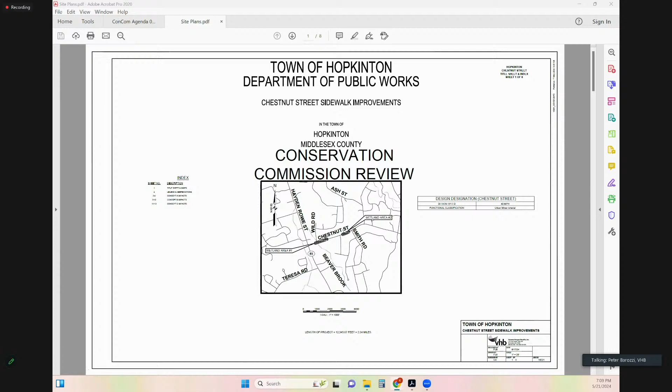So we had put together initial preliminary designs, and that's what I put together as alternative A for this, which includes shifting the curb in towards the road. We found this to be the least amount of impact.

However, in subsequent discussions with the town, with Kerry and engineering, they expressed concerns over bringing the road in and narrowing it. There is enough movement for traffic, but from experience on Main Street and other concerns impacting the existing drainage structures there, they expressed more of a desire to maintain the existing curb line.

So the alternative we show here shows the existing sidewalk, our rough limit of grading from our models as to areas that would be impacted. In this alternative, there would be a 6-inch granite curb as our roadway edge treatment, and then a 5-foot sidewalk right up next to it.

And again, so it kind of shows what it would look like in this area. We put together some rough metrics as to what we think the impacts will be. Again, these numbers aren't definitive.

We haven't advanced the design to final because we wanted to get the commission's input on how they felt about these alternatives before we move ahead and try to present something a little more final, in which case we'll be going ahead of the commission, submitting an NOI, and these numbers will be a bit more finalized. So this was alternative A, with the curb line shifted in.

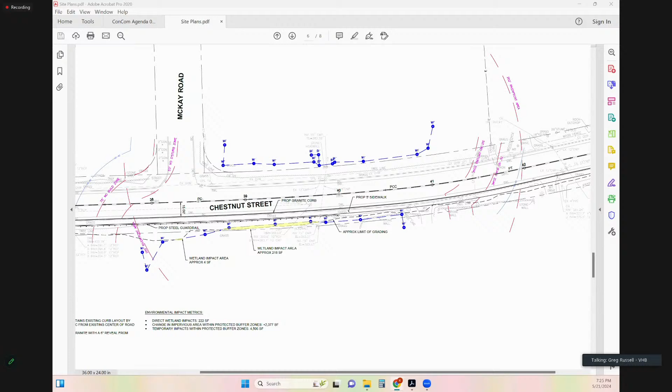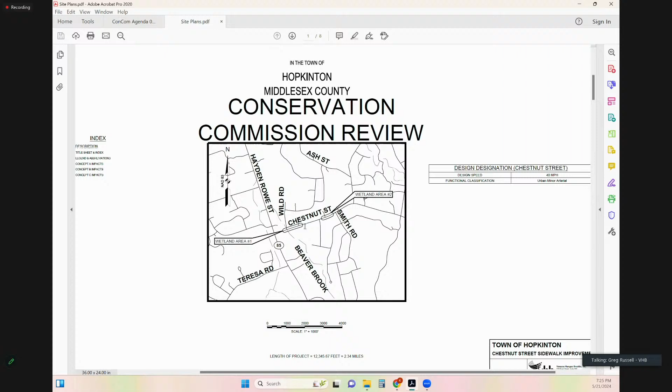And then with the intent, we were looking at it in sections, with the long-term vision of potentially carrying this all the way out to the traffic signal at Hayden Rowe. But that got put on hold due to the need to replace the existing culvert just to the west of Wild Road. So a few different things went into that decision.

Again, the limits of this are based on funding and the available funding that the town has. So depending, we may put this out with one piece as an add-on to the project to see what kind of, so the limits may change in construction, but we're looking to permit the whole piece at the moment, just so that we have that flexibility when we go to construction.

Through the chair. Yes, Matt. Apologies if I missed this, I was on my phone earlier driving. What are the project limits? I see 2.34 miles, but we've only got wetland area 1 and 2 highlighted. Are you guys going from Wild Road to Smith Road, or where does this begin and end?

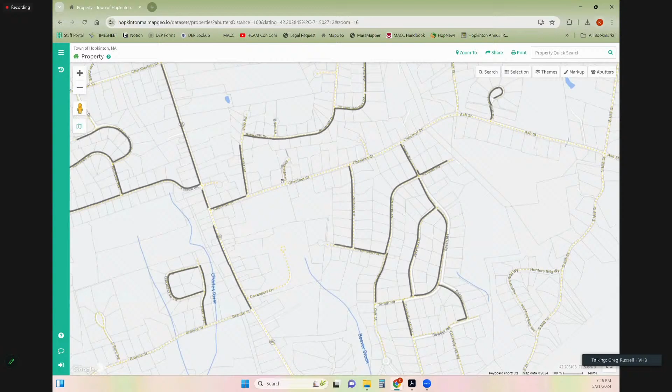So the initial plan was to go from Wild Road to Smith Road. I think the 2.34 is a typo, but we're basing that on, again, available funding. We looked at it based on the funding that was available. We said that might get us to a certain point.

We also applied for a grant through the DOT Shared Streets program to extend the limits of the project, make sure we got all the way to Smith Road, or further if we needed to. And then, just from a planning standpoint, it made sense to look at whether it made sense to bring the sidewalk all the way out to Hayden Rowe and tie it to the traffic signal directly.

So we took a look at that, and the town's having a culvert assessment done currently. One of those is the culvert just to the west of Wild Road that's been called out for replacement. So we felt that at this time, Wild Road was the appropriate place to end it, rather than build a new sidewalk to have it ripped up when the culvert needs to be replaced.

Yeah, makes sense. And is there going to be design incorporated into this project to cross Chestnut Street or Wild Road? Yes. So we'll provide wheelchair ramps and ADA compliant crosswalks.

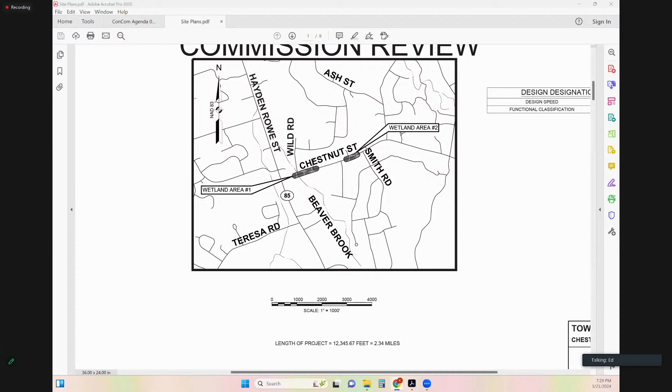Does anyone on the board have any other feedback? Through the chair, this is Ed. Yes, Ed, sorry I'm late getting into this. I had all kinds of difficulty and finally had to beg my dear wife to help, and we finally got in. I'm not really sure what our problem is, and I'm not really sure how I got in.

But my question, what is the curb width of Chestnut Street compared to the current curb width of Main Street, curb to curb? So you're asking for the existing curb width? Right, the pavement width, curb to curb. Right.

So it should be, I think, around 30 feet. You have about 4 foot shoulders existing and 11-foot travel lanes. So 22 and 8.

Correct. Okay, I just had an idea where we narrowed Main Street to put in sidewalks and bike lanes. I didn't know whether the same could be done on Chestnut Street. So, options B and C both maintain the existing pavement width of the roadway.

Okay, I think if there's no other comments, do you have enough information? Yes, Kim, sorry, just one last comment. For the benefit of the engineering team, I do think offsite mitigation could potentially be really beneficial. However, I do know that there could possibly be some problems convincing DEP. So my recommendation would be, before you potentially explore that, explore it with DEP as well to see if they also would be amenable. That's all. Thank you.

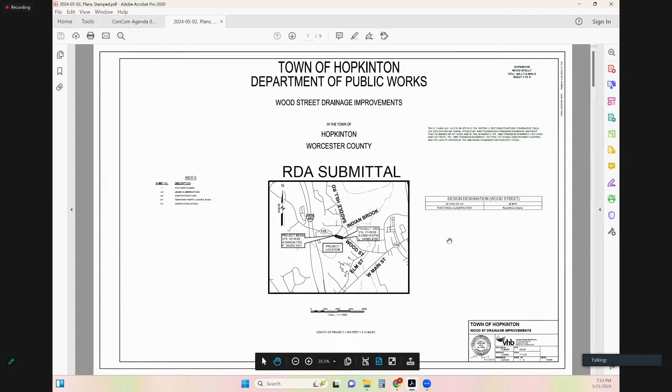So, hi everyone. All right, I don't have my camera on, but again, Kerry Reed, Director of Public Works. Thank you for having us.

As Kerry said, this is the Wood Street Drainage Improvement Project. Kerry showed an overview, but this is another overview. This is the project area right here along Wood Street. As you can see, it's right in the middle of a wetland complex with Indian Brook passing under the roadway here. We have a close-up of the actual work area between Walker Street and Indian Brook.

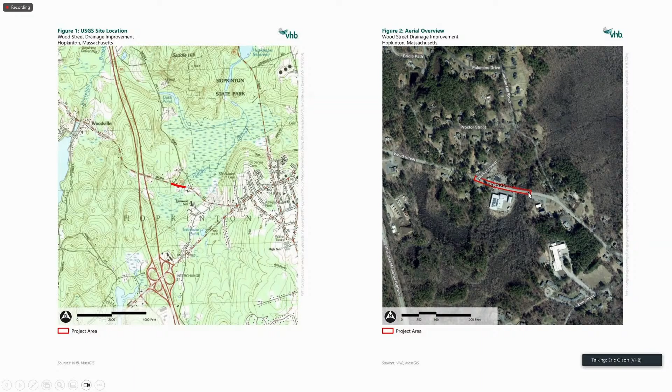The applicant is the Town of Hopkinton DPW. As Carrie stated, the project need is due to the existing outfall from one catch basin along the intersection of Walker Street and Wood Street discharging onto this residential property. It's causing flooding on the property, and we don't have permission for that drainage easement. So the work area itself would be located within the roadway easement along Wood Street and Walker Street. Everything is within the easement.

The work overview would be to terminate that outfall and reroute the stormwater underground through pipes directly to the culvert underneath the roadway that discharges into Indian Brook. Along the way, we'd also install improvements along the roadway. We'd install two new catch basins along Wood Street to capture storm drainage, install an asphalt berm along the roadway to keep the stormwater along the road and prevent overland flow into adjacent wetlands, and enhance and stabilize an existing eroded stone swale.

So just to back up a bit, this is the catch basin that's discharging in this direction, out to this point, and onto the existing residential property, causing flooding downhill here. The enhancement and stabilizing of the existing stone swale will be right here, where you can see some erosion. This is further down, Indian Brook right here within wetland 1. There's overland flow coming through this curb break, causing a little erosion. The plan is to enhance this with riprap and stabilize it so we're not having additional erosion into the wetland and stream.

So currently, I have Peter Baruzzi and Luke Boucher here with me, so correct me if I'm wrong, gentlemen. But what doesn't discharge into this catch basin and go out this outfall, probably from just east of Walker Street, just flows down the roadway and goes essentially down right here. There might be some overland flow going off the road in various areas, but I think a lot of it does directly flow right to the wetland through this eroded break in the curb right next to the DPW driveway right here.

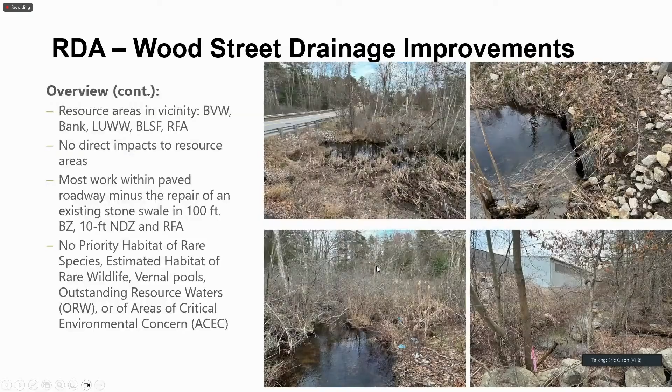So I'll back up to over here. So yeah, it flows down the roadway here and kind of goes right to the wetland through that little break in the curb. So yes, that's accurate. There's no treatment - all the water is flowing overland and not receiving any treatment or anything like that.

And so the goal of adding those additional structures would be to provide some more treatment, get some more suspended solids and everything out of the water, and get the water treated before it ends up in Indian Brook. Additionally, getting the water off the road as quickly as possible, so there's no gutter spread or anything like that, or cars splashing it up.

Okay. Yeah, Luke Boucher with VHB. Sorry, not to pepper you with four people from VHB, but I just wanted to chime in one thing.

There was one spot. Essentially, like what Eric was saying, we're running that trunk line down the road to convey this one catch basin. But since we're running the trunk line down the road, there were a couple spots where there's puddling, so we might as well drop a catch basin there and help out with that situation.

And there was another spot where we're putting a little bit of berm, and that was a spot where water was actually running along the road. It wasn't washing out, it was essentially just eroding the side of the adjacent grass area, picking up sediment as it went.

I guess I would be curious to know, is this in the Charles? I should know this. Is this in the Charles River, or is this outside of our MS4 area? Through the chair, it's in the MS4 area, but it's not in the Charles River watershed.

Okay, so I was just curious if there were any, I mean, I know you have the deep sump catch basins for TSS as an improvement. Do we look at the soils or anything for additional infiltration or any additional BMP improvements?

I'm not sure really where we'd find any space to do any kind of infiltration. We were working within the roadway. The only spot where we're doing any work on the earthwork at all is just right here, and that's just to add riprap to keep this from eroding and capture sediment that comes down. So I'm not sure if there's really any space available for infiltration, especially since we're working within the roadway easement.

Within the right of way, there's not a ton of space. There is the town-owned DPW property right there, but they have a relatively substantial system already in the front parking lot. And obviously there are a bunch of utilities through this corridor as well that we have to avoid - there's gas and water and sewer through here. So with all of those, we end up a little bit limited on our space, particularly within the right of way.

Also noted that the project states it will not increase any impervious surfaces or result in any new discharges to the wetland resources. The existing discharge is actually to an upland area, and then it flows overland. I didn't examine that in detail, but I think it just more or less flows overland eventually to the resource area. However, what they're proposing is the new discharge is directly to Indian Brook within the culverts under the street.

So that could be considered a new discharge. I don't know if the applicant has some additional information as far as why they would not consider that a new discharge.

I noted a couple things on the site plans. The 10-foot no disturb and the 15-foot no build zones were not indicated on the plans. Same with the 100-foot inner riparian line.

The stream, Indian Brook, flowing through the culverts under Wood Street, is perennial, obviously, and the culverts actually function as the bank to that stream at that point. So you're actually adding a discharge to the culvert, which is functioning as the bank of the stream at that point.

Which is a little bit different than if you're proposing a discharge up gradient of a wetland. The stormwater outfall, although it's proposed within the pavement, it's actually proposed essentially on the bank of the stream with the culvert. And then we thought that a waiver request would be necessary for that.

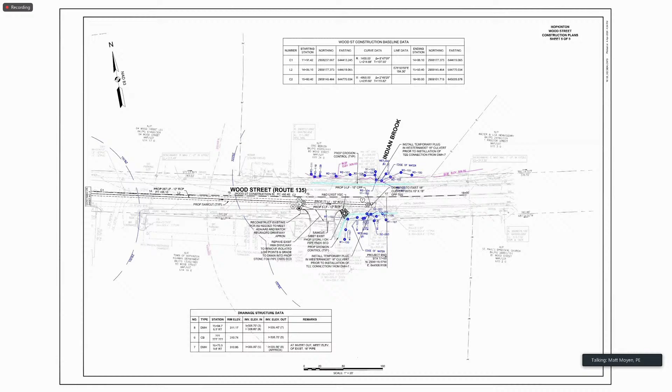And I do believe, while there's not a definitive curb treatment on the north side of the road, I drive by that area every day. My recollection is there's basically a hump along that existing commercial development to stop roadway runoff from flooding their parking lot. So I don't know that there would be much additional, and it looks like the topography on the plan shows that as well. Contours kind of jump back on themselves. I don't know that there would necessarily need to be additional curbing the entire length of Wood Street. There may be a couple of spots across from the DPW lot where you can see that ponding. But really, we're talking about 3 catch basins and another 60 linear feet of pipe to do some pretty substantial improvements to currently untreated segments of Wood Street.

And if there's a time to do it, now would be the time to do that. Right. Through the chair, I will mention we do have some major utilities, as you know, like the sewer pump stations right there. So we do have some challenges with getting across the street with other utilities. I don't know if we'd be able to put a deep sump catch basin on the other side and still get across. Understood. Yeah, it just sounded like there wasn't much of an evaluation up to this point.

And if the answer is there's utility conflicts and it can't be done, then that's the answer. So I think for now, the decision is either we can vote on the RDA and what the commission thinks, whether this meets the criteria for an RDA, or whether we think it triggers a notice of intent, which it sounds like there's a lot of discussion on this. So I'm kind of leaning towards notice of intent to vet those alternatives. But the other thing we could do is ask whether DPW wants to consider the feedback for tonight, or would like us to go ahead and vote.

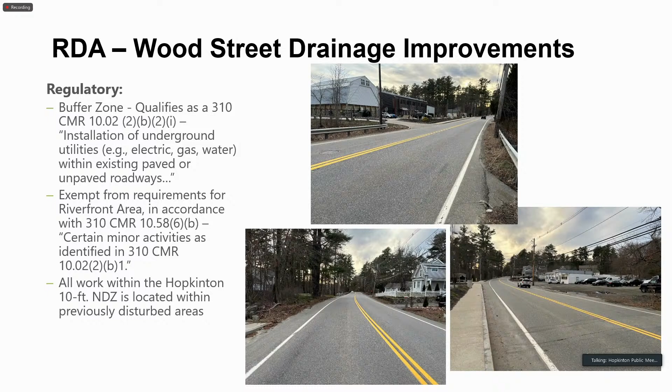Okay. Let's go ahead and take a vote then. Can I get a motion to issue? All right, so this is the negative positive form of an RDA, right? Through the chair, can you give a recommendation on the motion to make it least confusing? Perhaps you might want to take a temperature of the individual commissioners first, and then the applicant can get a feel for if they might just want to withdraw the RDA without prejudice.

Okay. All right, Matt, what are you feeling? I'm feeling like this is better suited as an NOI. NOI. How about you, Ted? NOI. All right, Ed. You're on mute, Ed. Having trouble tonight. Oh, there you go. I'm going to say no opinion. Okay. And Jim. I'm prepared to vote for a negative determination.

Meaning you think an RDA is appropriate? Yes, the RDA is adequate. Okay, go ahead, Kim.

It sounds like we need a motion. Let me pull up the RDA form here and make sure I'm doing this correctly. You're the chair. I don't think we got Melissa's opinion. Sure, so that may split the vote. Yeah, I feel like NOI.

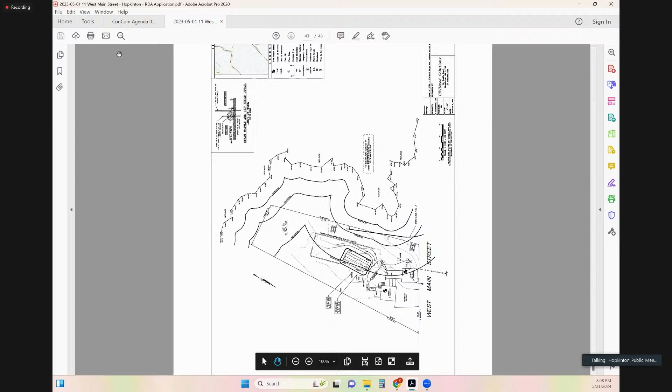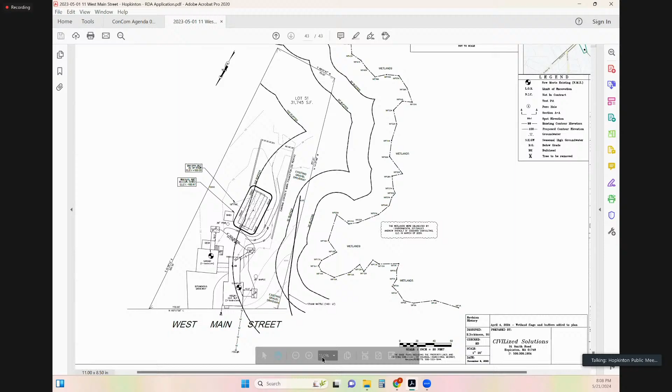Hi everyone, this is Andrew Thibault with Goddard Consulting. Hi Andrew. Perfect, thank you Kim. I'm the representative for the applicant, Carlos Henkel.

The commission may remember, so this property earlier this spring, would have been late February, early March, had started the construction of a septic system and a cease and desist was issued. At that time, there was an approved septic design through the Board of Health for the property. It was unknown that there was wetlands adjacent to the property off to the east. So work had begun, the wetland flags that were actually previously there from a year prior were discovered. A cease and desist was issued, and the applicant was asked to withhold any future work and file an RDA for the remaining work.

Since that point, we had gone out and redelineated these wetlands. They were delineated for a different property owner about a year prior. So the delineation that is now up in the field was put up specifically for this job. Because all of it is off-site, it was not requested to be reviewed as part of the project. However, everything was delineated that would issue a buffer onto our project.

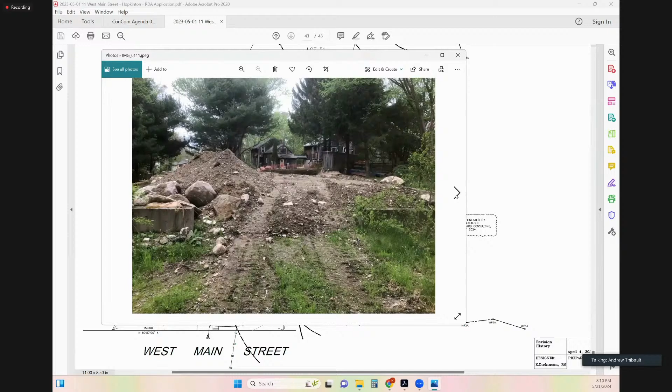So the property that we see here is 11 West Main Street. It's located at the corner of West Main, a couple properties down is Wayland Road. It's about a 3/4 acre lot with an existing 3-bedroom home and a 1-bedroom detached apartment. It has an impervious bituminous driveway and an existing gravel/dirt driveway off on the eastern corner of the property. The property's been developed for a while, and there previously on the property were 2 cesspools, which are now failing. The cesspool that was designed for the existing 3-bedroom home is currently contaminating the groundwater.

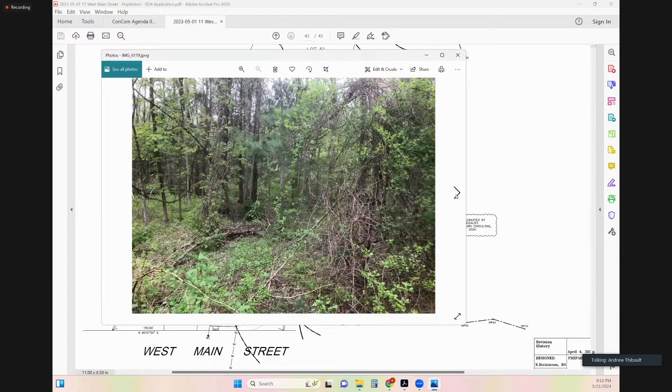It's a failed system, and so the goal has been to replace it with a Title V compliance system. That compliance system is located greater than 50 feet from the wetlands. It's between the 50 and the 100-foot buffer zone, roughly about 75 feet for a limit of work, as you see here on the plans.

The system itself consists of two different two-compartment tanks associated with the existing house and the existing detached one-bedroom apartment, and it's a stone leaching field.

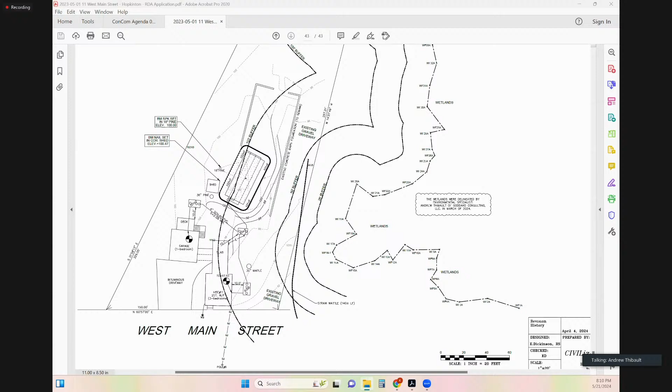They were able to get a 4-foot separation to groundwater on the property, so no variances were needed. The system you see here has been approved by the Board of Health, but no construction has continued since that cease and desist. So this application is looking to get a negative determination to allow that work to continue and install this system.

There's no other work on the property with this RDA application. It's purely to replace the failed system with a Title V compliant system. So if you guys have any questions, I'm happy to answer them.

Okay, Joe, did you have any comments on this? Yeah, I have just a couple. I did have a chance to go out and look at the site.

As Andrew mentioned, the delineation is offsite, so I didn't do any intensive inspection of the delineation, but I did look at the flags that pretty much control the buffer zone in the proposed work area. Based on vegetation and the slope there, I had no issues with the flagging in that area. That was roughly flag 15A through 21A.

As was shown in some of the photos, erosion control has been installed. The wattles are installed. I know the application noted wattles and silt fence as erosion control, but probably the wattles are sufficient unless a stockpile is moved closer to that location.

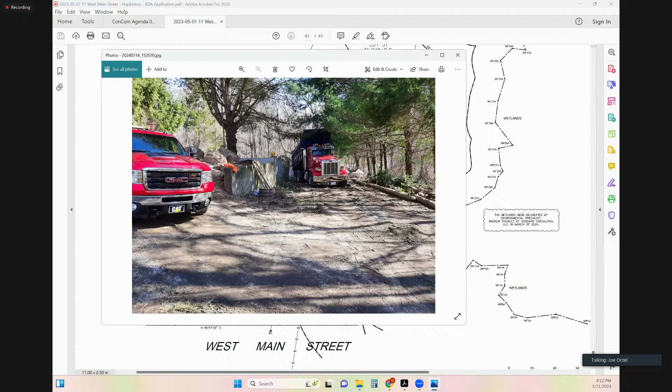Also noted that there's a large debris pile on the site and some invasive species, and just recommending that those are handled appropriately and disposed of appropriately when the work is occurring or at some point in the future.

Just a quick note on the stream on the adjacent property - it was reported as perennial, where I think actually it is mapped as intermittent, and a stream stats review would find it to be intermittent also. So there's no potential for riverfront area on the site.

I did note in the application that no proof of mailing to abutters was included. I don't know if the commission did receive that or not. Also noted that the plan was not stamped - being an RDA, the commission has discretion as far as what they want to accept for plans. So that's for the commission to discuss.

And just one other thing that was noted - an exemption. Presumption shall apply for installation of a septic system, a Title V septic system. There's an exemption noted in the narrative. I just want to note that exemption applies to the discharge from the septic system, but not to the actual construction of the septic system. So the construction work would not be included in that presumption under the Title V exemption.

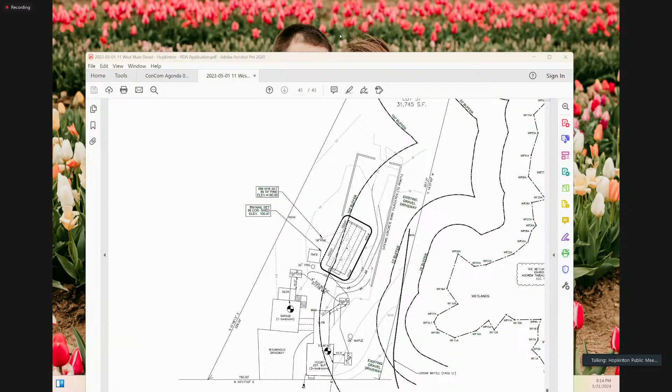I'm wondering, as you comment, if there's anything here in regards to that we can do with the RDA for PIBs on the tree line there, given that we didn't know the wetland buffer was there and had to stop construction.

Through the chair? Yes. Yeah, that was one of my comments as well, is can we get some PIBs? They're probably going to have to be on the property line, along the property line here, but that still might be a good visual barrier moving forward.

And then my last question for the applicant is, what is your dewatering protocol moving forward?

I can answer both of those. As an applicant team, we were happy to install PIBs. I think that's a great idea for the property. There's anticipated to be future work on the site under a separate application in the future, so we're happy to install that. At this point, I have not been given a dewatering plan by the on-site crew, but I'm happy to provide that prior to this work resuming.

I would just add that it's very important that the on-site crew understands the proper dewatering protocols. Absolutely, thank you. Does anyone else from the commission have any questions or comments?

No. Okay, so I think we can go ahead and take a vote.

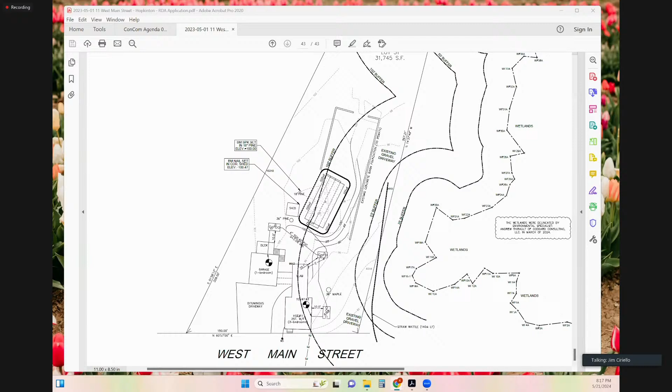Ted, aye. Jim, yes, aye. Ed, aye. Matt, aye. And I am an aye. Okay, so all set. Perfect. Good luck. Thank you all.

Thanks. All right, we'll move right along to our continued hearings. Town of Hopkinton, 90-104 Hayden Rowe, notice of intent continuation. Do we have someone on the call for this?

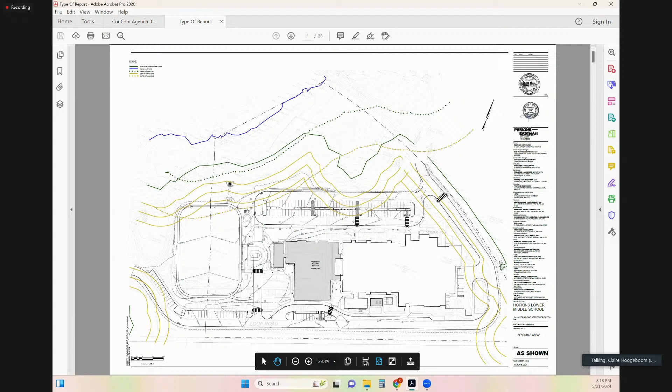That initial peer review response excluded some comments and requests for information on the stormwater, as we were still waiting on peer review comments for stormwater in relation to the planning board's site plan review as well. So we wanted to get this initial review response into the commission to knock out as many comments as we could in the meantime. We have since received the stormwater peer review comments about a week and a half ago, maybe a little less, so the team is working on preparing responses and revising plans to address those comments.

So prior to the next meeting with the Conservation Commission, the team intends to prepare a second peer review response report that includes responses to all of the stormwater peer review comments, as well as comments provided by the commission at the last public hearing. It'll include responses to DEP comments - we had 3 that were all related to stormwater as well. And of course, that'll all include revised plans that show any stormwater changes, in addition to, I believe, the commission asked for PIB locations and some educational signage around stormwater features and along buffers, and a few other items as well.

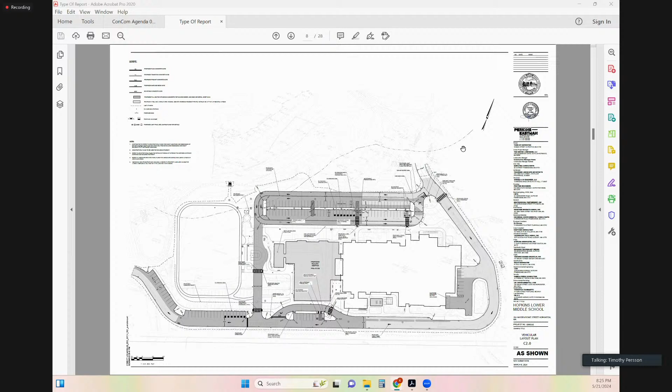So I think typically what happens is we'll steal a couple parking spaces, pile it there. And then again, the DPW comes in and removes it when they're doing their snow removal routes through town. So it typically sits there for potentially a couple of days up to a week, depending on what kind of storm we got. And then they come through and scoop it all out at night and bring it to wherever they bring it to, or melting. So typically it's staying in the parking lot and stealing a couple spaces.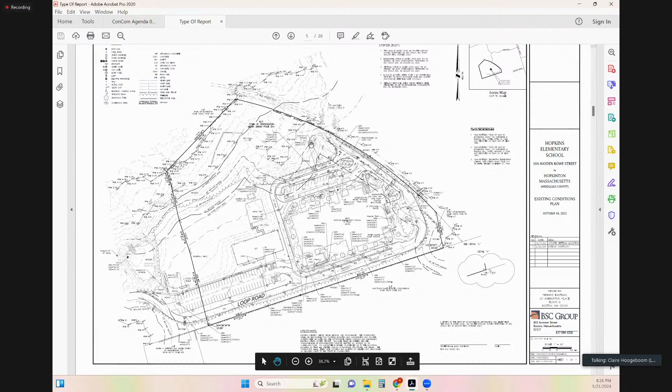Through the chair. Are we adding parking spaces in total, or are we losing with the big parking lot by the athletic field being cut down significantly? We are adding parking spaces through this project. I can find that number if you just give me a couple of minutes and we can jump to another topic while I dig for that. But I believe we might be adding somewhere in the high 20s, low 30s of parking spaces for this project.

I don't, for myself, through the chair, I don't need an exact number. It sounds to me like I would rather keep the current plan then. I live in that neighborhood. I know it doesn't take long for the DPW to come scoop up snow. If we're adding that many parking spaces, I'd rather the snow melt in the pavement and then have storm drains deal with it than have it possibly melt into the wetlands.

Okay, unless there's a current problem with the current system, like if that's causing huge issues. But even so, if we're adding 20 to 30 spots, taking up 3 or 4 for a pile of snow on the few occasions we get snow, seems like it ought to be workable.

Okay, we'll take that into consideration. Through the chair, just one other quick thing to add about potentially keeping the snow on the pavement. Certainly a benefit for any debris that gets picked up with the snow, but the salt is either going to run through a pipe down to the wetland or it's going to run overland through the wetland. I think we want to also be sensitive to the safety of the students that are going to be navigating around the site. So if we do continue to pile snow on the paved area, it's important that we put thought into a location that doesn't create a pedestrian hazard for those couple of days before the snow is removed.

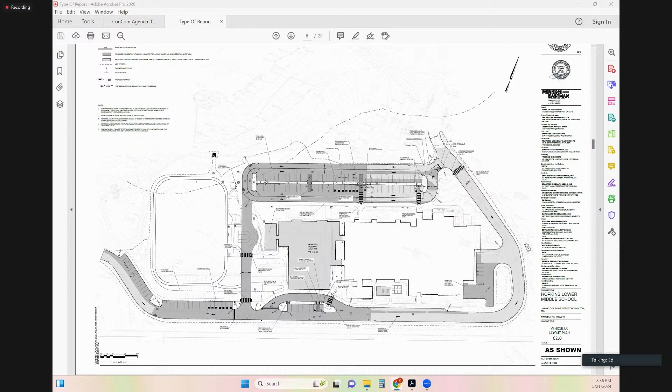All right, next up we have 0 East Main Street, notice of intent continuation, commercial building, recreational sports court. I believe that last time we just opened this and continued it right away, so I don't think we got any background yet. That's right, because we didn't quite get the comments from Lucas at that time. Okay, but now we have, and we have an opportunity to respond to that as well.

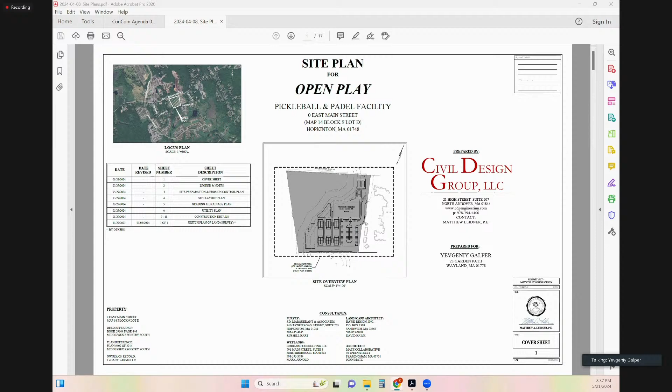So my name is Yev. It's a brand new construction, and I'm planning to buy a piece of land and build a pickleball and padel club with 9 courts. Some of them are going to be indoors, and some outdoors - 3 courts up north and 6 courts down south. And I invited to this meeting a couple of people who helped me draft an NOI, Mitch and Matt, who helped me put together the site plan and stormwater management.

So I would like to pass the word to Mitch to present the comments and the response to comments from the peer review. Sure, thanks for the intro, Yev. So Mitch Maslanka with Goddard Consulting, wetland scientist. I helped Yev put together the notice of intent for the proposed building and padel court facilities.

So just to give you some background on the site - this site is adjacent to the retirement living area off to the right side of that plan. And where this building, parking, and padel court area is proposed is in a large field adjacent to that retirement living area. It's currently utilized as a mowed area for a leaching field, and other portions of the site are regularly mowed in a meadow habitat area. Then as you get closer to the wetlands, shown off to the top left corner of the screen, those are our wetlands.

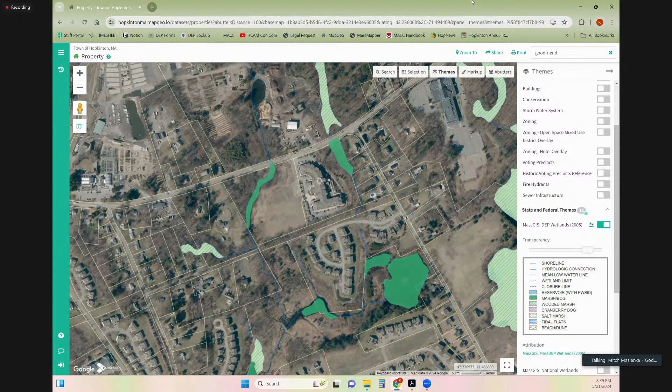So as you can see, that green area is a wetland connection from north of East Main Street - comes a stream, goes under the road, then enters our site, goes through some forested wetlands, and then down towards the left side of the screen goes through a wet meadow area, and eventually leaves the site off to the bottom left corner. So you can see the majority of the area where the building and padel courts are proposed is in an already disturbed area - majority of it is lawn, underneath there is the leaching field, and other portions are meadow habitat.

So off to the top right of the screen, you can see that's where the entrance is going to be. It's a shared driveway with the retirement living area, and that'll eventually connect into the facility's own driveway and parking spaces down at the bottom right of our site.

Then to the left of our parking area, that's where 6 pickleball/padel courts will be proposed, so people can go in there and play their games. And then off to the left of those courts, we have a fence, and then we're going to have a line of trees, which we can get to on the landscape plan in a bit.

To the left of that rectangular looking polygon is a subsurface infiltration system, which will manage the stormwater runoff from the impervious surfaces of the site.

Just up to the plan north and east, we also have another part of the stormwater system, a surface infiltration basin, which will also be assisting in managing the stormwater runoff. And then furthest plan south is another aspect of our stormwater management, in more linear fashion, going parallel to the bottom property boundary down there.

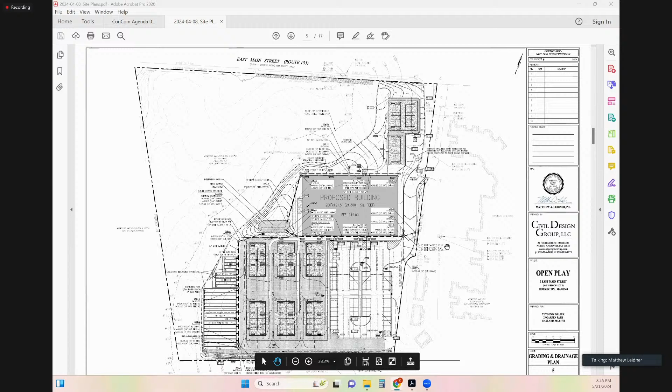I think you covered it fairly well. Matt Leidner, Civil Design Group. Good evening, everybody. No, I think Mitch, you covered it fairly well. Of course, if there's any specific questions, I'm happy to go into any aspects of it in detail.

Great, thanks, Matt. So yeah, Joe, do you want to go through some of your main comments and we can kind of comment on those for you?

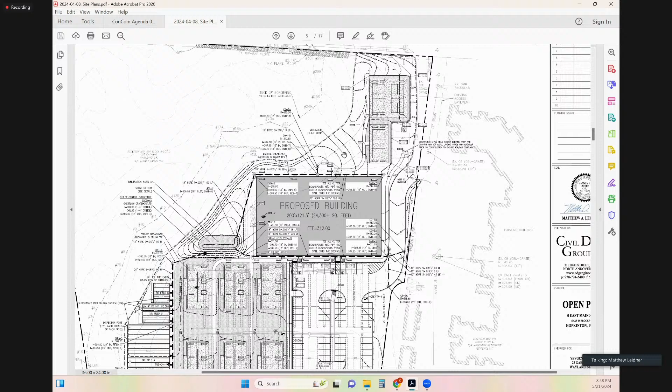Also, to the north of the building, the runoff from the 3 pickleball courts is proposed to undergo pre-treatment through a vegetated filter strip. One of the comments at our pre-application meeting was to label that on the plan as a treatment area, to ensure that it does get maintained accordingly. So if there's any other specific questions, I'd be happy to address those.

Through the chair. Go ahead, Kim. I apologize, Matt, I have not re-reviewed the O&M plan, so I will do so ahead of our next meeting and make sure I can get you any additional comments. Okay, very good. We're happy to work with you to address those if there are any more.

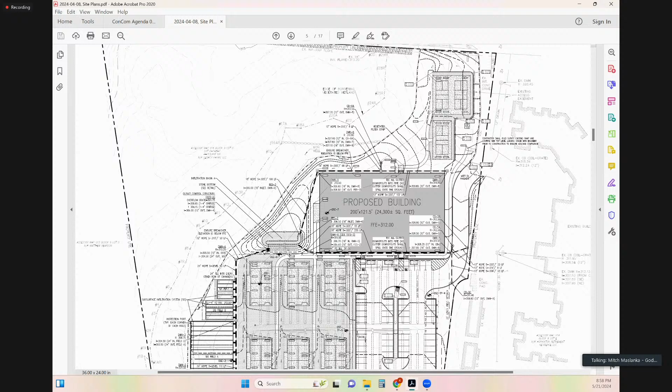Thank you. I don't know if we want to talk about the PIB for a minute. There's none proposed at the moment, right? By the applicant. Correct, yeah, we didn't show any on the plans. Okay, Kim, can you go down to I think it's the last sheet, it has an aerial behind it.

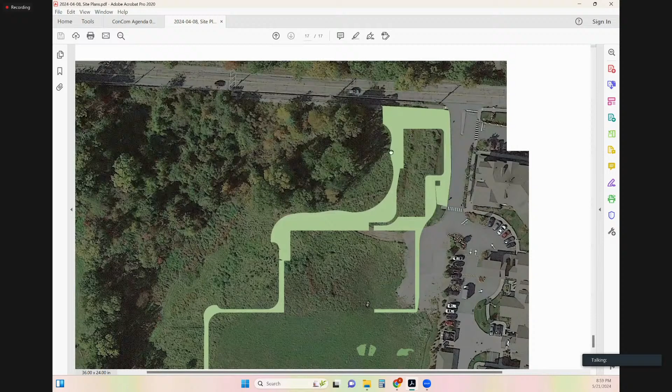So I'm curious to see what others think, but obviously there's a big space that I guess the concern would be landscapers potentially over zealously mowing into the buffer zone, and I don't see a lot of trees to where there would potentially be a PIB line.

Also, whether anyone on the commission has comments as far as the extent of the development on the site in relation to the buffer zone lines, where that PIB should land. I don't think the PIB should be inside the stormwater infrastructure, infiltration system and basin.

Yeah, Melissa, I agree. I think, ideally, toe slope. It sounds like there's some proposed plantings. I don't know what the plan is for that first 50 feet of the buffer area, if that's going to remain as is today and just allowed to grow in, or if there's plans to maintain that going forward. But if that's going to be left to grow in, I think we want our PIBs right along that toe slope, so it's clear as landscapers are coming through that they're not overzealously mowing down to the wetland edge, whether that means we suggest a few larger tree plantings along that line where we can hang the PIBs, or some other measure. I don't know what the best approach is, but that's my feeling on it.

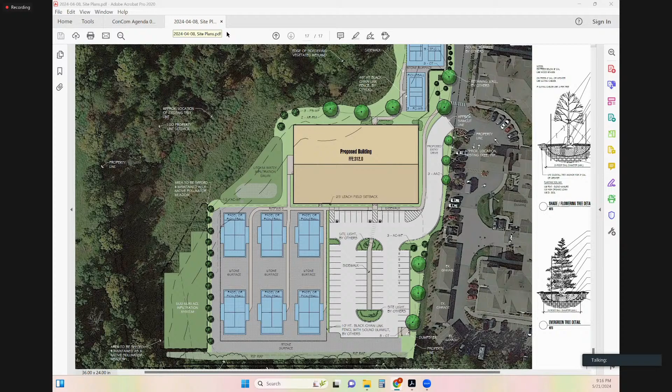Okay, next up we have the Mass Laborers Training Trust Fund, 37 East Street, Notice of Intent continuation. Do we have anyone on the call from the labor side? Yes. Hi there, good evening, Ryan Roseen with Goddard Consulting.

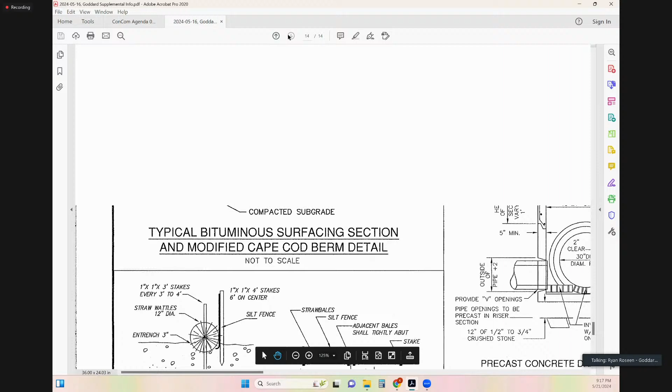While Kim pulls up the latest plan we submitted, I'll briefly go through what's changed since the last meeting. We did respond to Lucas Environmental's comments and made a number of minor plan changes that were requested in that letter. We still have that drainage area going down to that area. We are proposing to put in 4 new red maples because 4 healthy pine trees are being removed, so we are mitigating for that.

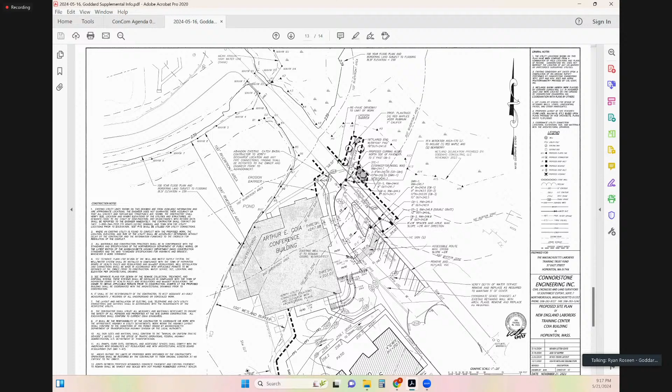In addition, I think the biggest thing the commission asked for last time was cumulative riverfront numbers for the entirety of the site, since there are a lot of projects going on around it. So we had our engineer provide those numbers to prove compliance with the redevelopment standards. I'm not sure if Lucas had a chance to review the revised materials we sent in last week, but we are actually proposing 170 square feet of riverfront mitigation.

As you can see on that plan, it's that shaded area directly adjacent, just to the right of the proposed drainage pipe and outfall. So that basically accounts for 1 tree, 2 shrubs, and a wildlife conservation seed mix in that area.

And just to reiterate, for the entirety of the project, especially on the southwestern side of the road, there's an overall decrease in impervious surfaces within the riverfront area, about 380 square feet. And then we are improving the stormwater management—this is a stormwater management plan.

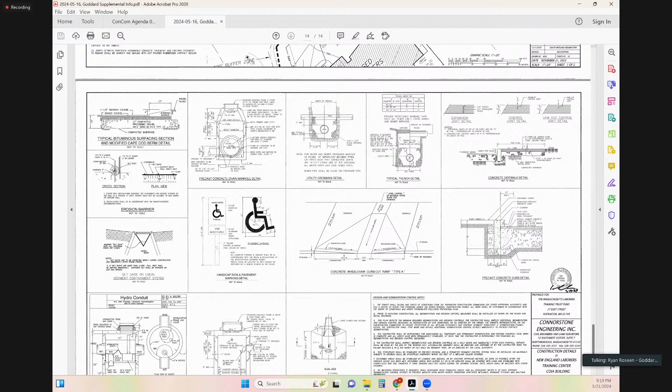There is that detail for the riprap apron, which is one of the things that was asked for as a detail. And I think the other main thing was looking at other possibilities for removing or moving the location of the drainage pipe and the drainage structure overall.

As you remember, we first did this as an RDA where the pipe went basically along the northeast side of the roadway, almost all the way down to where the bridge is located, right up to the river's edge. So we pulled that back in this iteration of the plan.

The only other option that the engineer said would be feasible, but is not a practical alternative, is to put in a surface stormwater basin in that area. But that would require a much larger surface area of disturbance—more work in the buffer zone, more work in the riverfront area, and taking down more trees. So for that greater disturbance, we decided to stick with this plan as you see here. It's pretty minor in impacts, and we believe that we're fully mitigating those impacts.

So I'll just keep it at that, and if there are other questions or comments from the commission, I'd be happy to answer those. Okay, Joe, were your comments addressed, or did you have anything you wanted to bring up?

Yeah, I did have a chance to look over the responses. Didn't have a chance to respond formally, but I think many of our comments were addressed. A couple of things I just wanted to note.

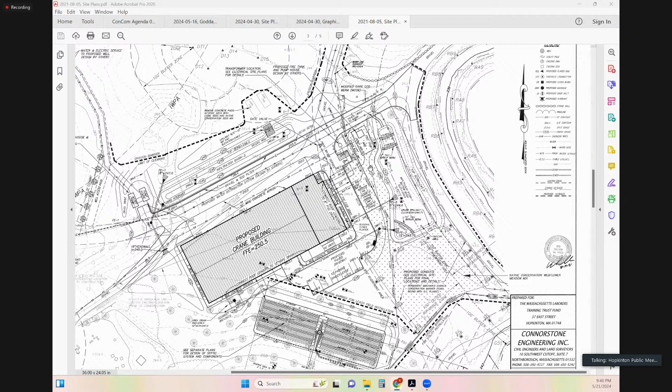I think we would love to give credit for these types of things, but right now we just have a number or a table. I think what we asked for in the last meeting, and what would be helpful to finalize this and have a document to move forward with, is to provide the breakdown that's being requested and a graphic associated with that, so it makes Kim and Joe's job easy to see what you're explaining, in one package, and we can build off of that going forward. I think that's really what we're looking for, and then we don't have to bring it up all the time.

So, what it was, how many square feet it was, and what it turned into - documenting that is really what the commission's looking for. So it's not going back through these explanations to try and figure it out, and then you can get credit going forward.

So I guess, again, if the applicant's amenable to continuing to June 11th and providing what it was, how many square feet it was, what it turned into, that type of breakdown with the associated site-wide plan, then we can stop having to go through this every time we have an application. It'll be a lot smoother, I think, going forward when you bring projects. Does that work? You'll have to. Okay.

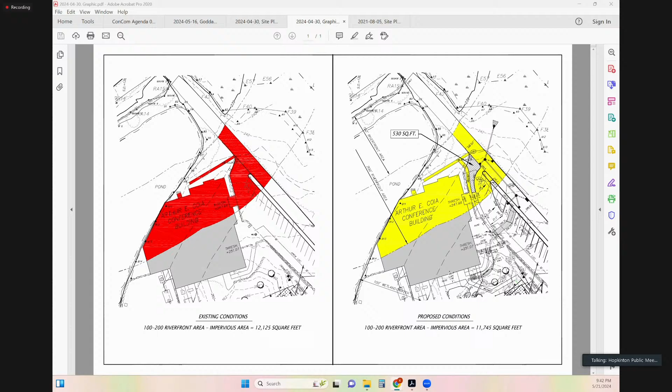And I think just the sooner we can get that to Kim so she can take a look and provide some feedback, hopefully at the next hearing we can just slam dunk this issue. Okay, thank you, we'll provide that as soon as we can. Okay, thanks.

All right, next up we have Vail Street Development, 12 North Mill Street. Continuation on the abbreviated notice of intent, notice of resource area delineation, sorry. Kim, do you want to start this one off? Where we're at, I can't remember. Yes, I can talk to this one. So two hearings back, we reviewed the updated plans with Vail Street Development and Goddard.

Vail Street Development felt that enough expenditure and time had been devoted to this project, and the commission agreed that they would not have Lucas Environmental back out to the site to review the flags associated with an internal intermittent stream on the site. Otherwise, Lucas Environmental and Goddard Consulting agreed on all of the other BVW boundary flags. Joe, let me know if that's incorrect.

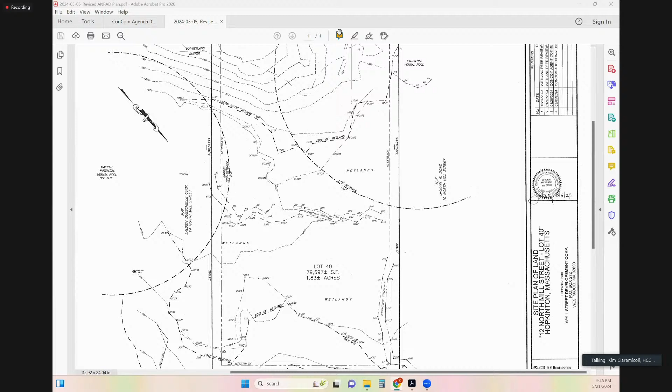Mr. Petrosi will be very happy. I hope so, through the chair. Signatures, right? Yes, please, I make a motion that Kim can sign on behalf of the commissioners. And I second. All in favor, Ted? Aye. Jim? Aye. Ed? My feet are still wet from when I walked it, but aye. Matt? Aye. And Melissa's an aye.

Okay, so that's all for our hearings. Down to work session items. We got to, I think we're on number 4. Oh, we get Vail Street Development, number 2, 8-10-12 Leonard Street, request to waive fees for certificate of compliance.

So there's a lot of plans, I hope this one is close to the right one. This was permitted in 2018 for the construction of a single family home at 178 Ash Street. There's an intermittent stream to the southeast of the site. The site generally grades east and south and east towards Ash Street.

So in 2018, the Conservation Commission permitted the single family home, including clearing and grading of the lot and associated driveway and septic system. The limit of work was the 50-foot no disturb zone.

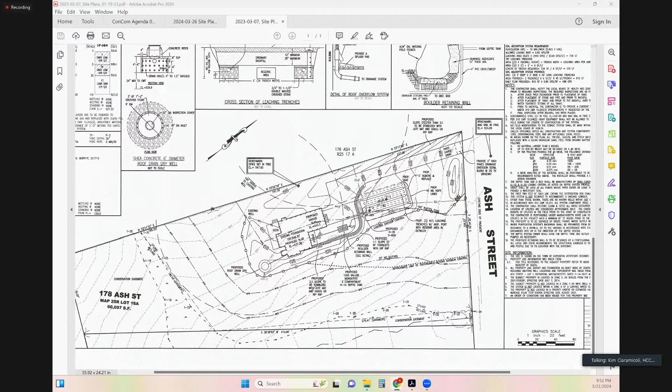In 2021, construction began, and the agent, myself, during this transition time, issued a cease and desist. There was clearing and grubbing observed beyond the limit of work. The applicant's contractor, who was hired to do the clearing and grubbing, started work before the erosion control barrier was installed, so there was a bit of a miscommunication there. According to the plan submitted, the disturbed area totaled 5,830 square feet within the buffer zone.

So in January of 2022, the Commission issued an amended order of conditions. The amendments consisted of a reduction in the footprint of the dwelling, the addition of a deck and porch, a shifting of the location of the septic tank, and grading adjustments at the rear of the home. The amended order also included buffer zone mitigation, consisting of 54 native trees and 26 native shrubs.

The applicant has completed the work at the site, the construction of the single family home, and they have submitted a request for certificate of compliance. The applicant's engineer did note some deviations from the approved plans.

Currently, the driveway is gravel instead of paved. The diversion berm is not installed - this is the diversion berm here. In the proposed plans, some runoff from the driveway would come down, hit a swale, and then be diverted into this berm. So that system was not installed.

There is a slope near the septic tank that is not stabilized with riprap. The area behind the house is only partially stabilized with loam and seed. And the engineer reported that there was some tree clearing inside the 50-foot and 100-foot buffer zone.

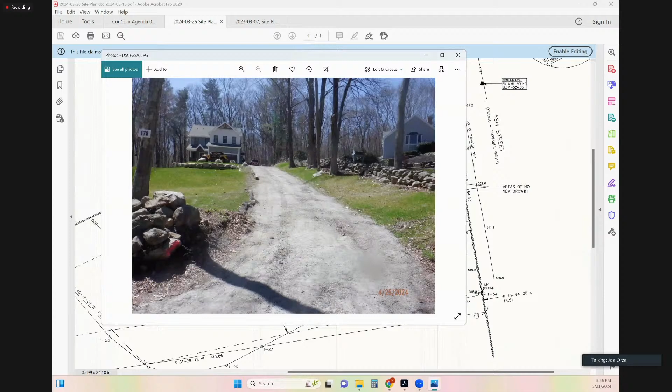The buffer zone mitigation area is regrowing naturally. Based on what I could see, it was never replanted as was required in the order of conditions. I did not do a detailed inspection of the mitigation area other than just noting a fair amount of natural native vegetation regrowing, some from tree sprouts and stump sprouts. Some areas remain fairly thin as far as any shrub or tree vegetation, and there's a fair amount of invasive vegetation coming up in those areas also.

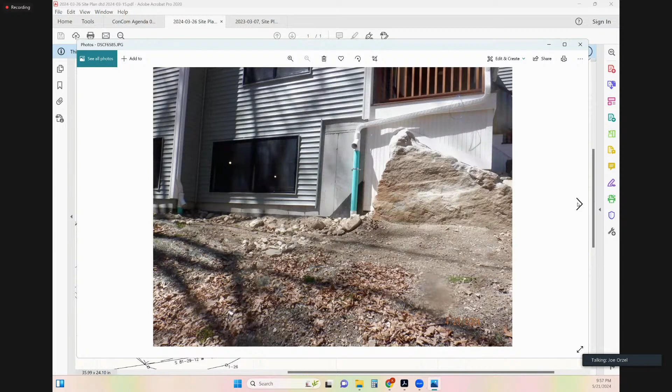So my recommendation was that the applicant provide a detailed monitoring report of those areas. It does not appear that any monitoring reports were submitted for the mitigation area, since I don't think it was planted. But I think a status report or monitoring report of those areas would provide the commission with information needed to determine if additional plantings need to be done, or if invasive species management needs to be done, which I would recommend, or if the regrowth is sufficient. And I think that's for the commission to discuss. That pretty much covers my comments for the site.

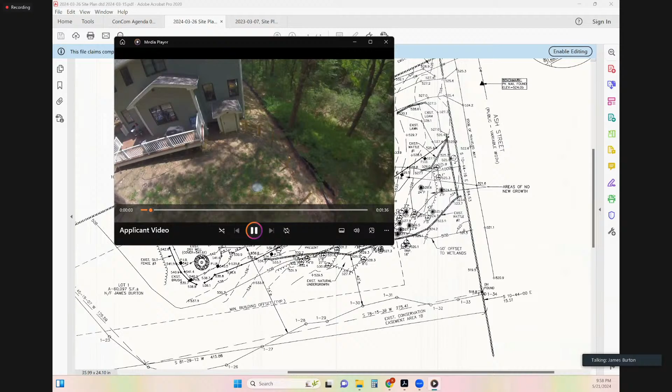According to JD Marquette's plan, there are numerous old growth trees already on the property, which weren't accounted for in the original plans. The original plans were, I don't know, maybe based on the idea that there was absolutely nothing there, but obviously there are trees there, full-size trees.

According to the Department of Environmental Protection, there's a critical root zone. So where the settling pond was going to be, the contractor that did the septic system was supposed to do that, never did it. However, I have managed to make grass grow there. I observed it during the last period of 24 hours of rain, which was just a couple of days ago.

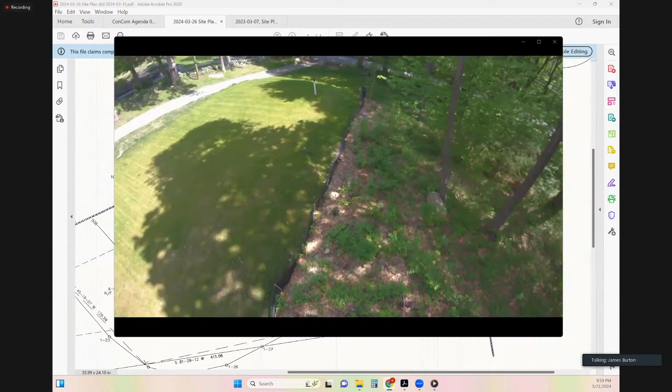There was another period of 24 hours of rain about 10 days ago. Right now, there's no erosion, there's no running over. All the erosion barriers are in place that were there before. I would, if I have to put the settling pond in, I will. But however, it will be within the root structure of all those trees.

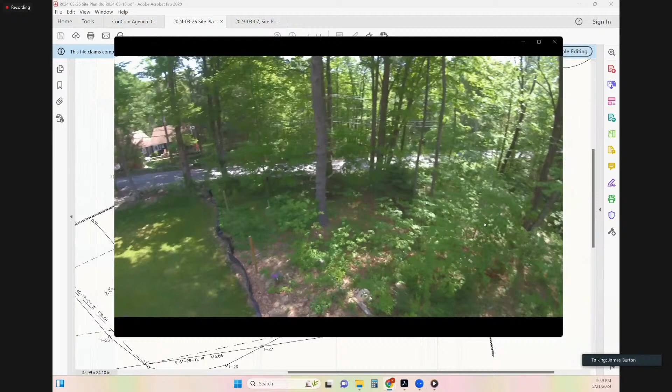Basically, the only section is right there in that video, right by that rock, where there was an absence of vegetation. So that's where I did all the plantings. I spaced them out according to whatever spacing that came with the plants. And they're easy enough to take care of too, from watering them right over the fence.

The driveway I will have paved. I just don't have the money for it right now. So if that could be a conditional element to getting this order removed, that is fine. I will get it done by the end of the summer.

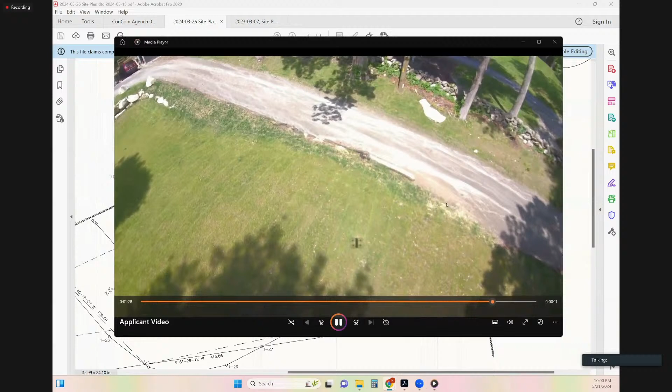Okay, this video was done today. There were some other pictures I pulled from the video, but the video pretty much tells its story.

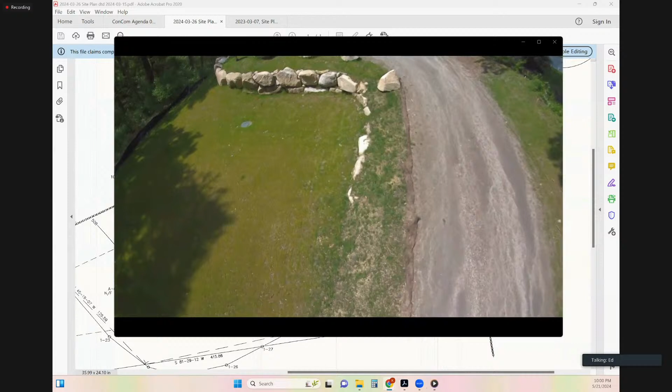Okay. So it sounds like there's been progress, definitely some progress made, since obviously we're in the height of growing season too.

Since April, yeah, that was my objective, is to take advantage of the spring rains. There is straw. I did throw straw, quite a bunch of it, all along that berm right there, which is compacted stone, bluestone.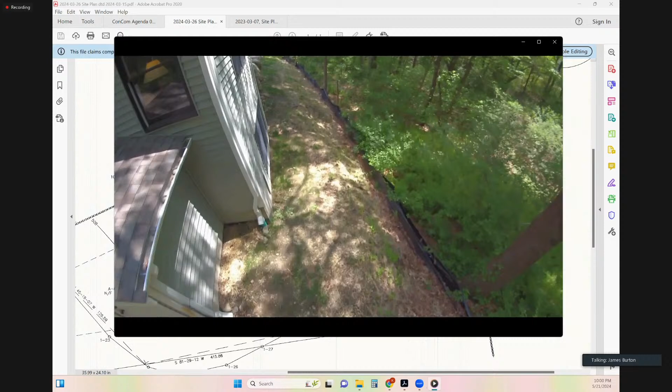There is that zip wrap stuff underneath the stone. Much of it's buried because I excavated out all the dirt that had eroded down against the fence and threw it back up onto the hill. Then I loamed over it. So it's hard to see, but it is there.

Okay, it does look like it's still, I forget if it's specified or what the standard is for percent cover to determine. So the front yard looks like it's growing in. The backyard looks like it still has a little ways to go before.

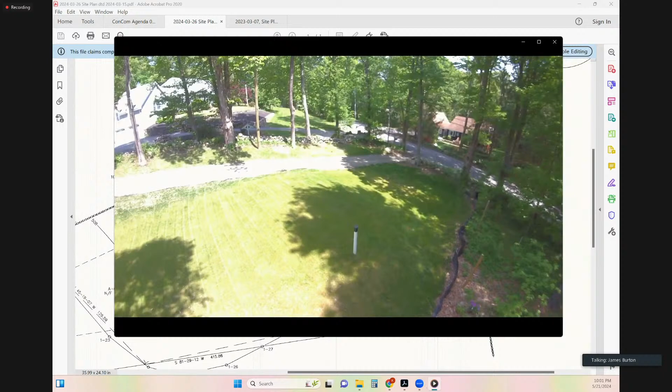I have 2 dogs, so I have to be careful with what I do with it, so that they don't get, if I do that spray grass on there, I don't think that's really good for the dogs. Yeah, so it's growing naturally on its own. I water it twice a day.

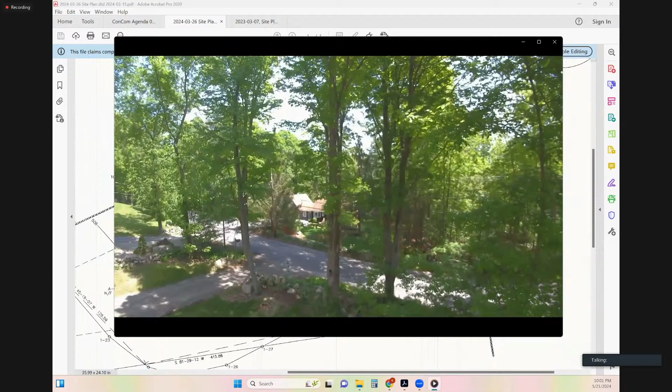Yeah, no, I get it. I also got rid of all the erosion that was in the street running from there all the way down to the edge of my property on Ash Street, which is about, I don't know, like 150 feet down to where the stream is.

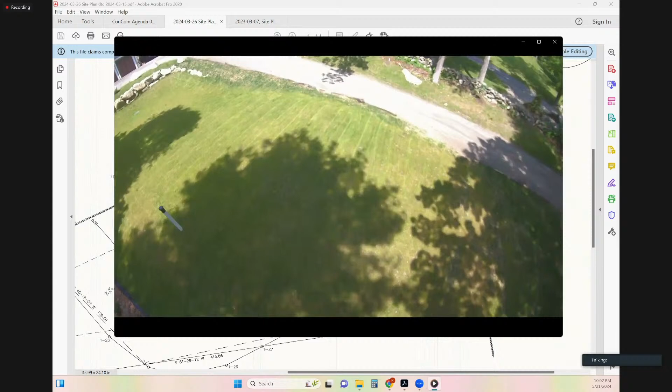Okay, I think as far as the outstanding items for the order, I mean, you can definitely see the water comes down your driveway pretty good there, which I think is the point of the berm at the bottom, the intention for the design to have that berm at the bottom, so it's not all washing into Ash Street.

So, I don't know, in my opinion, that's something that we would want to see. I understand we wouldn't want established trees. Not a fan of cutting down trees.

It's nice that there's trees that were maintained on the property, rather than cut down when it was built. So I don't know if there's any opportunity to move that berm a little higher on the driveway to avoid impacting the root structure of those established trees, and still have the same effect we're looking for, because you do have a very steep driveway. And it is a big area coming down there, not established in the back. So that would be one of my concerns before closing this out.

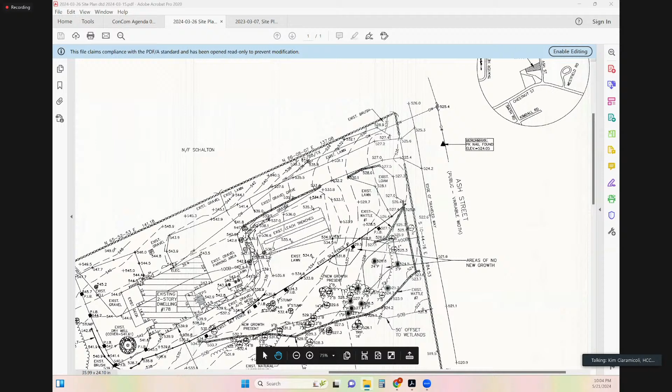I'm trying to find a part of the video or a photo. Like this slope. Ooh, it disappeared. Rather than the backyard, because this is kind of that area that drains straight closer to the intermittent stream down here.

Yeah, I mean, I think ideally this would be a little bit better vegetated. That's the area that I was also suggesting the silt fence remain in place until it's stabilized. So, yeah, I think we need a little more time to get this buttoned up before I'd be comfortable issuing a COC. I don't know if anyone else on the board has any comment on that.

Through the chair, I concur. The driveway has me worried. The lack of, I don't know, the hole at the end of the driveway to take the water. I think I heard the applicant say that he scooped out runoff from the street. So clearly the reason for that pit at the bottom is needed, and we're just going to have even more runoff likely once it's paved.

About that hill that Joe and Kim pointed out, is grass ever going to grow there? It looks like it's fully shaded. Is there a different plan for stabilization of that side yard? Because I'm just wondering if grass will ever grow there.

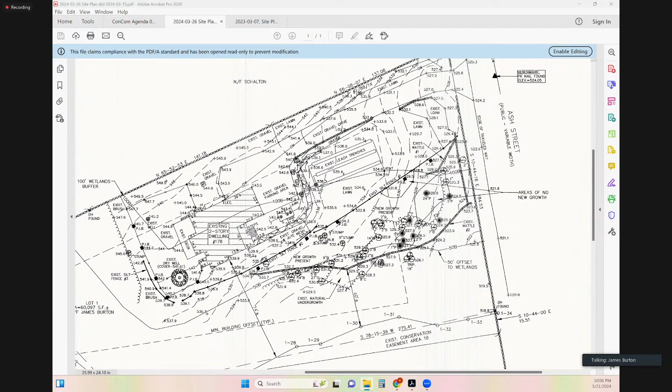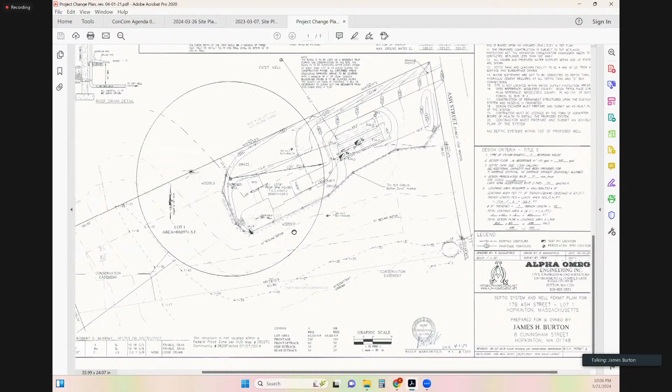So maybe we condition for jute matting, until it gets... There is grass growing now, but it's only been growing for a couple weeks because the last frost was around the 23rd of April. So really not much has grown because it's been so cold. But now that it's warm and sunny, it'll grow. We could just check it at some point in the future. You'll see that there'll be grass there.

Through the chair. Yes, Matt. It appeared in those pictures there were some downspouts tied into, I assume, a dry well. Are there gutters along the roof edge where that slope exists? And they're all cleaned out. Yeah.

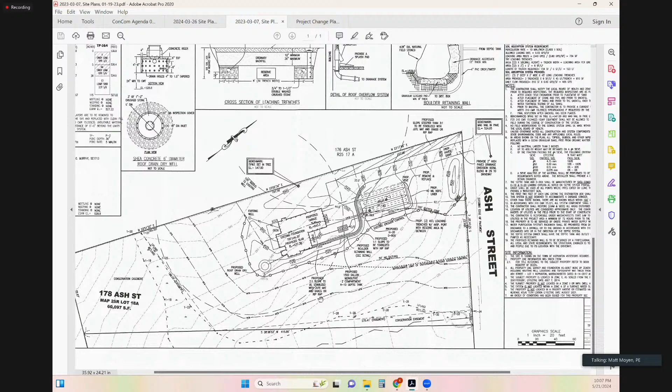So it would be great to see some vegetation starting to grow, even if it just occurs naturally over the next few months into the fall. I tend to agree that without the driveway being paved, I'd be uncomfortable issuing a COC. So that's really the primary concern on my part, getting that driveway paved so we can eliminate the primary source of sediment leaving the site and going into the right of way.

Most of the sediment ended up in the street during the initial construction phases, before a lot of the erosion barriers or any vegetation was in place, or the gutters were placed on the house. I've observed it during periods of extreme rain, and most of the loose bluestone is gone. So now it's just large rocks pretty much in the driveway. So there isn't really any more erosion.

Okay. Yeah, I mean, are you amenable to letting things grow and continuing, like Matt said, till maybe the fall? Yeah, that's fine, as long as we have a solid plan and expectations of what needs to be done, that's totally fine. Yeah, and I mean, I think the berm is important when it's paved. And if you need to make modifications as far as how that gets handled when it comes off the driveway, so you're not sacrificing trees, then we can have that conversation too.

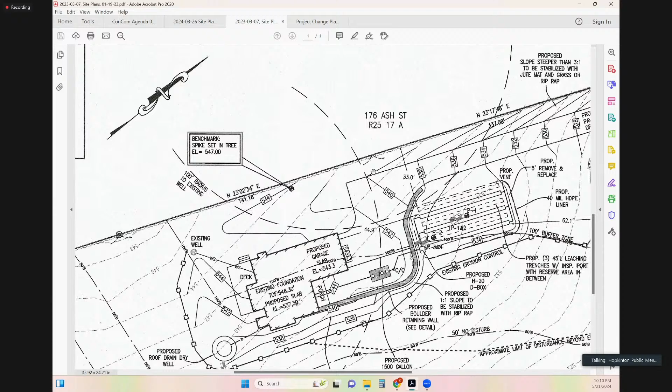Just the actual, if it needs to be slid, that's the whatever that is, can't see north away from the street. It's west, yes. That doesn't bother me. Okay, we can, yeah. Perfect, thank you.

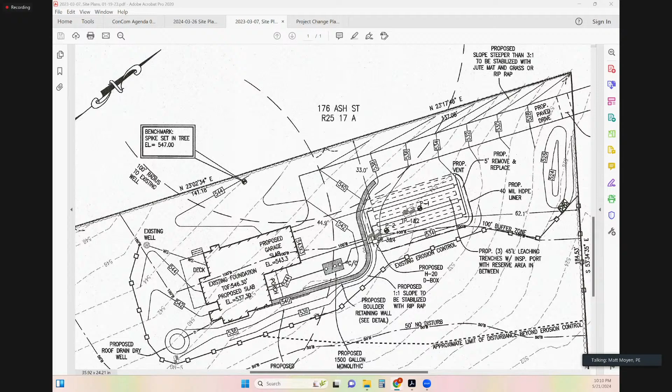Through the chair, yes. I may also suggest, to the point of some type of mitigation measure at the street edge there, that the engineer take a look at, in addition to potentially sliding it page left, instead of digging a hole and potentially killing those trees along the street line, diverting the runoff behind the stone wall in a manner that it can run overland more naturally, either through the stone wall or along the edge of the stone wall, with some type of stone control at the wood's edge to distribute it as sheet flow.

That may be a more cost-effective and least impactful solution to our concerns here, where you accomplish the goal of not letting the runoff just stream down onto Ash Street, but we also let that stormwater run over natural land down to the intermittent stream where it ultimately wants to get anyway. It's not going to create as much impact to that front yard as tearing it up after it's vegetated may otherwise do.

If you follow what I'm saying, Melissa, I know you've got... Yeah, you said it in a better way than I did. Because I don't necessarily know that the volume provides a whole lot of benefit here, as much as giving the flow an opportunity to run overland through the vegetation before it gets down to our resource area. Right. Yeah, I was thinking the same. There doesn't need to be a big excavation in the front yard.

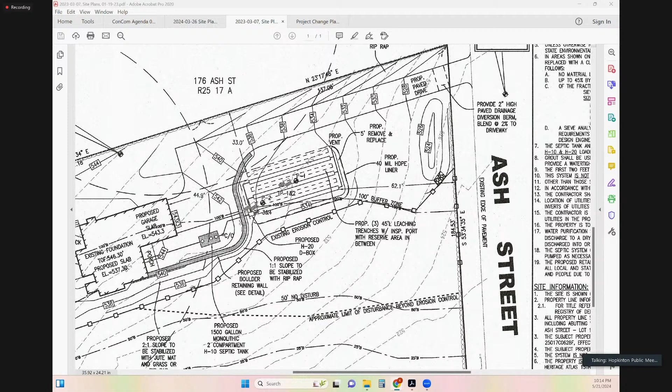I do drive by your house all the time, and I really like the architecture and the look of it. I thought it was really cool. It's just well placed. I think it turned out really nice for that lot. Thank you, it'll be a lot nicer when my driveway's paved, so I don't track dirt into my house.